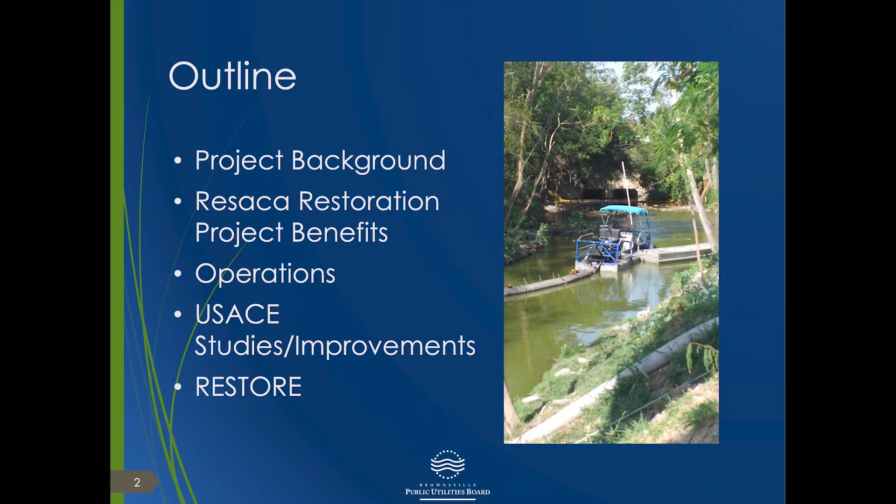I'll cover a little bit of background. I know at least some of you are familiar with the project. I'll touch on a little bit of the background for the project, the benefits of the project, our operation, and some of the work that we're working with other entities such as the U.S. Army Corps of Engineers and the Texas Commission on Environmental Quality, seeking funding grants for the project.

First of all, about PUB, we're municipally owned. The City Commission appoints the board members. There are 7 board members, including the mayor. We have electric, water, and wastewater services, approximately about 570 employees, but that changes from day to day, and about 64,000 customers, plus our revenue, which changes as well from year to year.

So resacas, for those of you that are not familiar with resacas - resacas are distributaries of the Rio Grande River. Their natural flow has been cut off over the years. Natural rain events and hurricane events would feed these waterways, these resacas, similar to oxbows, but not exactly an oxbow. So those natural flows have been cut off over the years by levees. The U.S. Army Corps of Engineers constructed levees to protect the communities here in the valley.

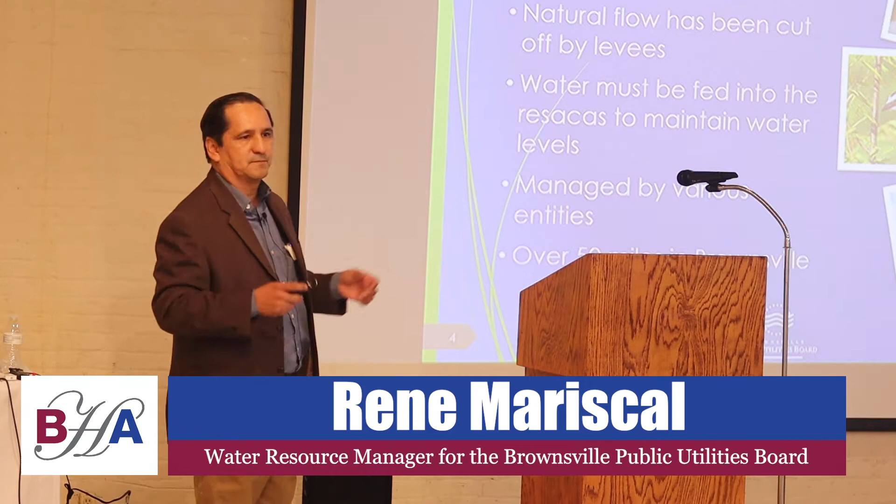So they've been cut off, and now different entities feed these waterways. PUB feeds some sections of these resacas here in Brownsville. Irrigation districts, such as Cameron County Irrigation District 6 and the Brownsville Irrigation Districts, also feed these waterways, typically on a daily basis. At least from our end, we're feeding the resacas daily. Again, they're managed by various entities. So when a hurricane is on its way, the different entities communicate with each other, and we have the ability to lower the resacas, although at a very slow pace. We're able to lower resacas and at the same time increase levels. There are over 50 miles of resacas within Brownsville.

If you look at the other resacas outside of Brownsville, Los Fresnos, San Benito, you're talking way over 70 miles of resacas throughout Cameron County. But here within Brownsville, approximately 50 miles.

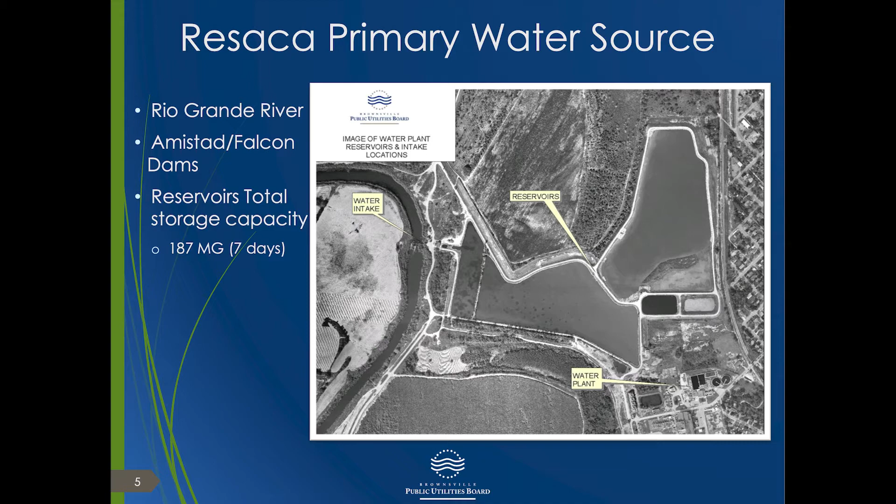At PUB, our primary source of water is the Rio Grande River. You see it here, up here, the Rio Grande River, and that feeds our 2 reservoirs. From our reservoirs, we then have the ability to feed the resacas.

From a utility standpoint, we have to order our water - we reach out to the IBWC, International Boundary and Water Commission, and we order the water for the community. We have to order the water 7 days in advance. And once we order the water 7 days in advance, we're able to store it. We have a capacity of roughly about 7 days at our reservoirs.

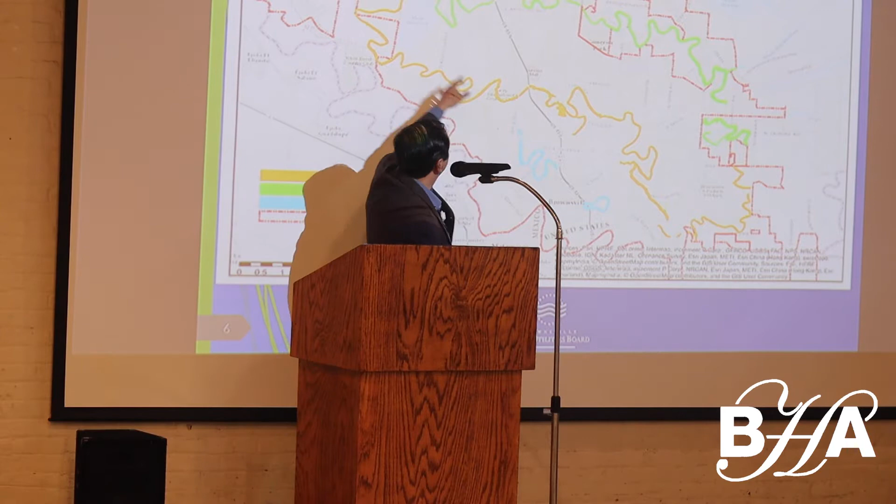The town resaca system is the one closest to us. Resaca de la Guerra runs across the city. On the northern end, closer to Alton Gloor, is Resaca del Rancho Viejo, which actually runs a little further north, stretching all the way to Olmito and Rancho Viejo. So those are the three systems.

I'll mention the town resaca system and some of the work we're doing down here. Our dredging work has all been concentrated down here, but some of the studies and grant funding we're seeking will help cover some of these other resacas, Resaca de la Guerra and del Rancho Viejo.

And there it is again, an aerial view, Rio Grande River. We pump to our reservoirs, and from here we're able to feed resacas.

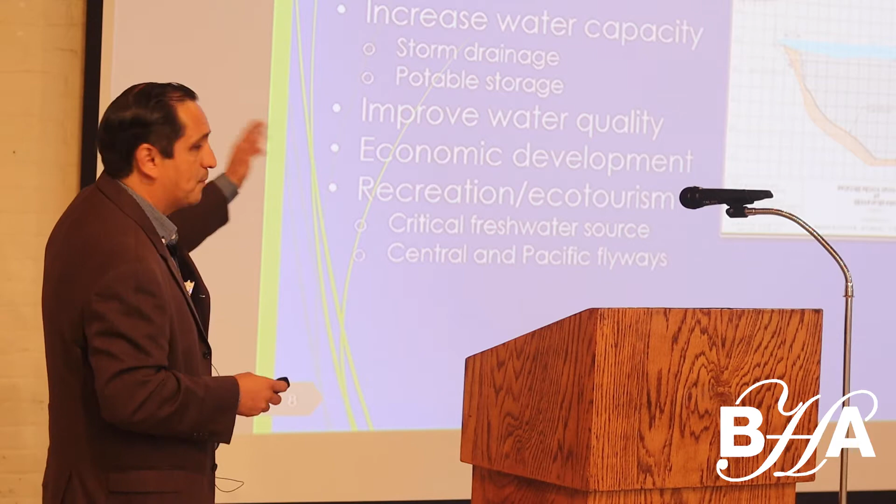So the benefits of the resaca restoration project: the resacas essentially have been silting in over years. A lot of these, really the majority if not the entirety, have never been dredged to the level we're dredging now. You may have some individual homeowners who went back with an excavator or backhoe and cleaned up their areas, but for the most part these resacas have been silting in over the years.

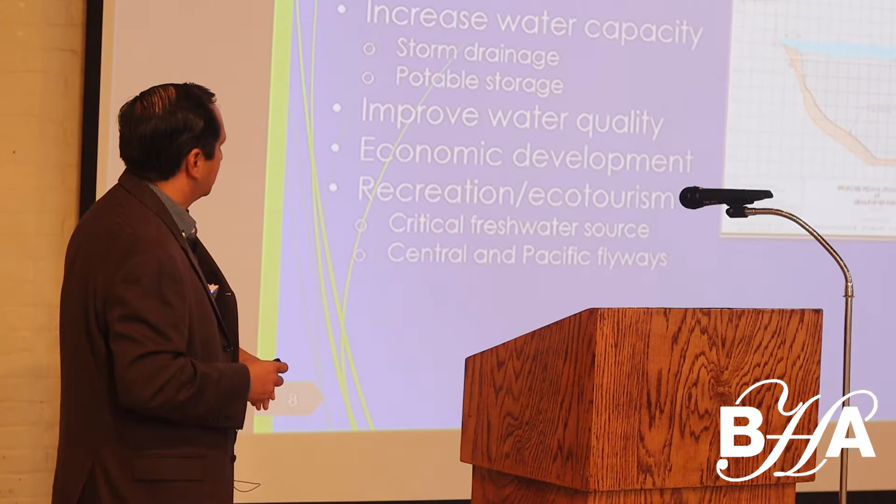One of the elements of the project is to dredge, to get back to the normal levels, the normal depth.

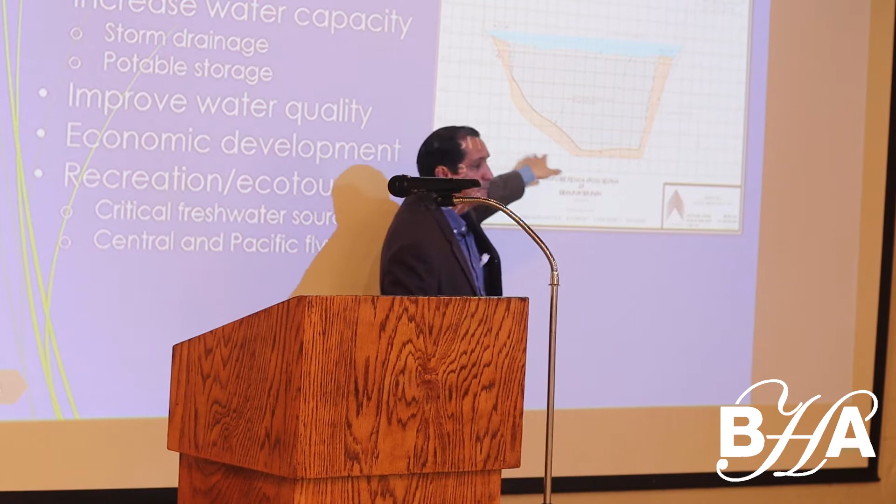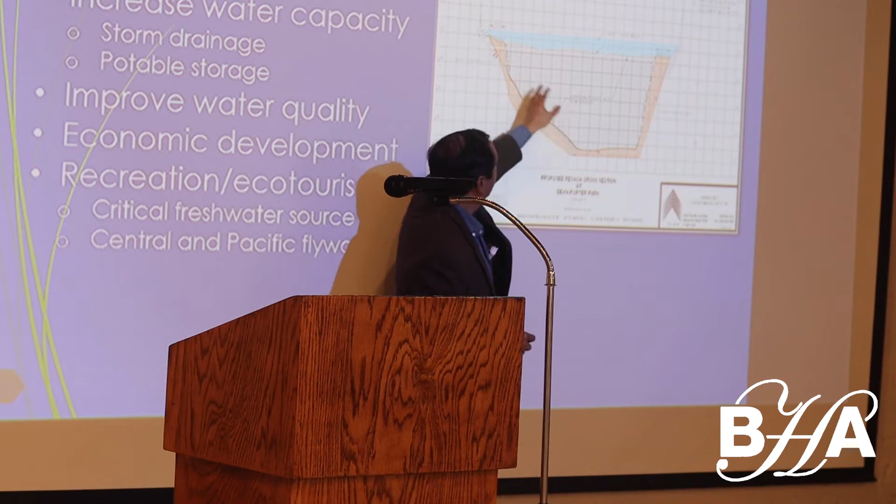This is a cross-section of the resaca at Dean Porter Park, part of the town resaca system. Every little gray square is essentially a foot, and the orange is the silt. We've already dredged this, so where we had maybe a foot or two of water depending on the area, we now have it a bit deeper, 6, 7 feet, even 9 feet in some pockets at Dean Porter Park.

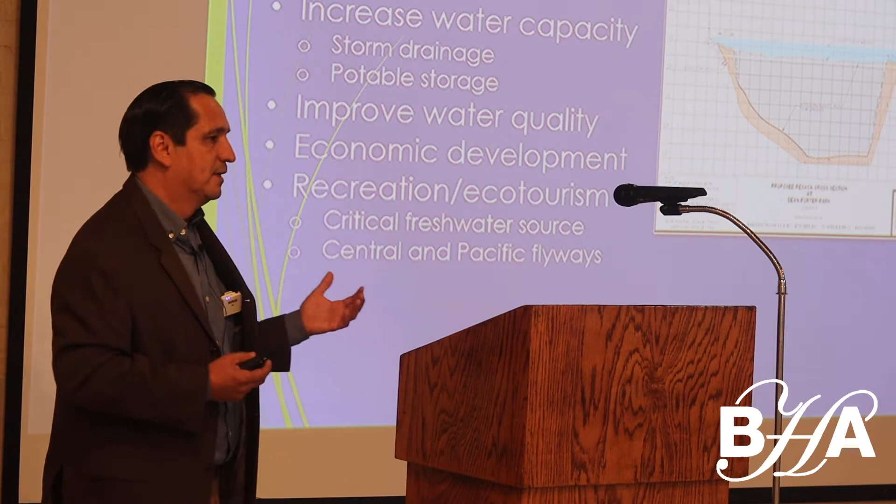So that's the goal. By doing that, we improve the water capacity. We're able to store water in these resacas, which also provides the utility with additional water storage.

How long did it take to silt in, and how long will it take to do it again? To silt in, clearly that's been over years, possibly since they were created, they've been silting in. As for how long before we have to go back: we have 50 miles, and given our current staffing and budget, we suspect it would take about 50 years to get to all of them. Unless you double up your staffing, then you cut your time in half, and so forth. But the idea is to at least work our way through all these segments and eventually restart the process.

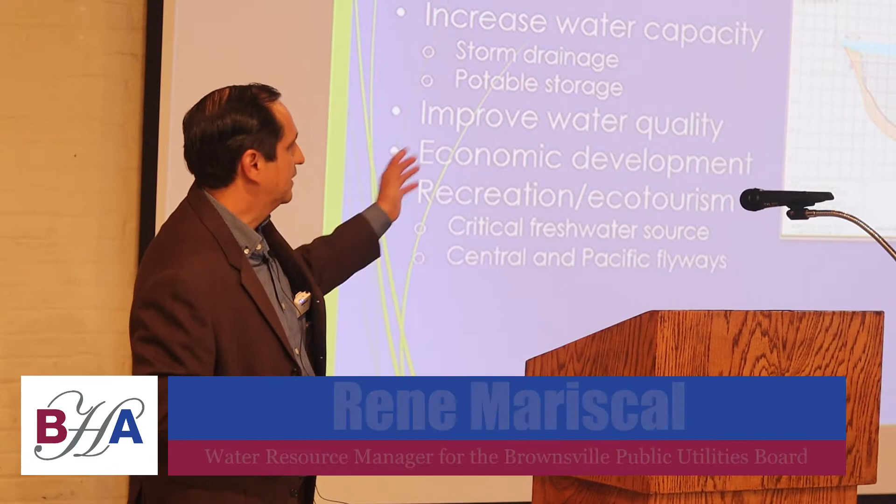Should we ask questions? Yeah, go ahead. On the three color code legends you gave earlier, do you know which ones are natural and which are man-made? For the most part, what you see here are natural resacas. You'll find little pockets in different areas that are man-made, but we're focusing primarily on the natural resacas, little pockets here and there where neighborhoods went and created their own.

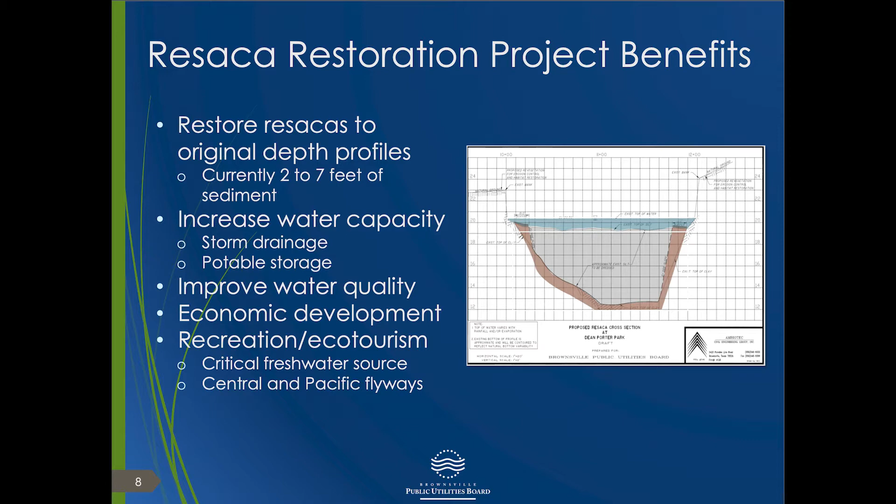Additional benefits: not only do we have storage capacity, when it rains here in Brownsville a lot of it drains into the resacas. So by dredging, you're creating not only water storage capacity but also helping with drainage, providing additional storm drainage.

It also improves water quality. Literally, some resacas are just mud, sediment, with low dissolved oxygen levels because there's very little water. In summer it's really hot, so you get low dissolved oxygen. By dredging, you help improve the water quality.

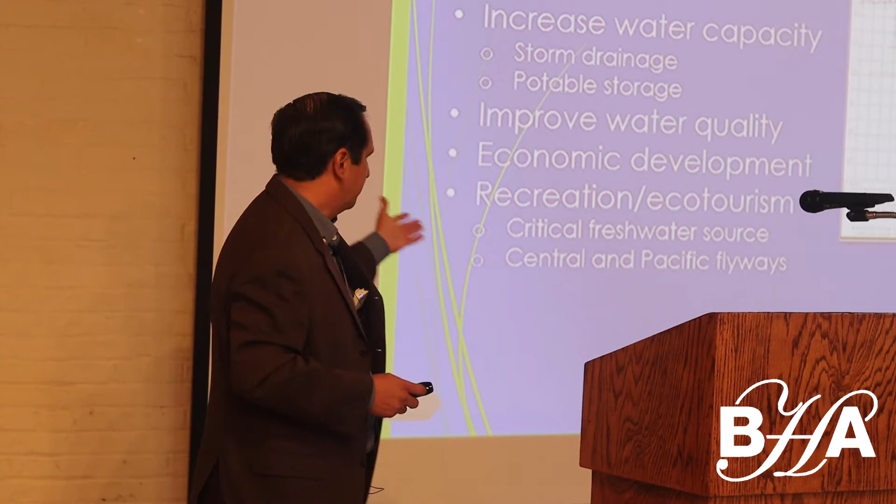There are also economic development benefits. A lot of folks have businesses with a resaca in the back. Having it nice and clean is part of the aesthetics here in Brownsville as well.

If your backyard is on the resaca, are there restrictions to use it, or are some restricted and some not? For the most part it depends on the location, but property owners typically own halfway of the resaca; in some cases the entire resaca. So it's really up to the property owners. Can they water their grass, can they put in a pump? Oh yes, yeah.

If you have a resaca on your back property, you can own it - at least within the City of Brownsville. Let me take that back - there are certain sections under the jurisdiction of an irrigation district that may have certain requirements, and that occurs even within the City of Brownsville. There may be certain sections where there's a fee, for example, and certain requirements. But for the most part, you own the resaca - that's your property. As far as city ordinance, there may be specific restrictions in certain resacas where maybe a motorboat is prohibited, but that's something depending on location you'd have to check with the city ordinance.

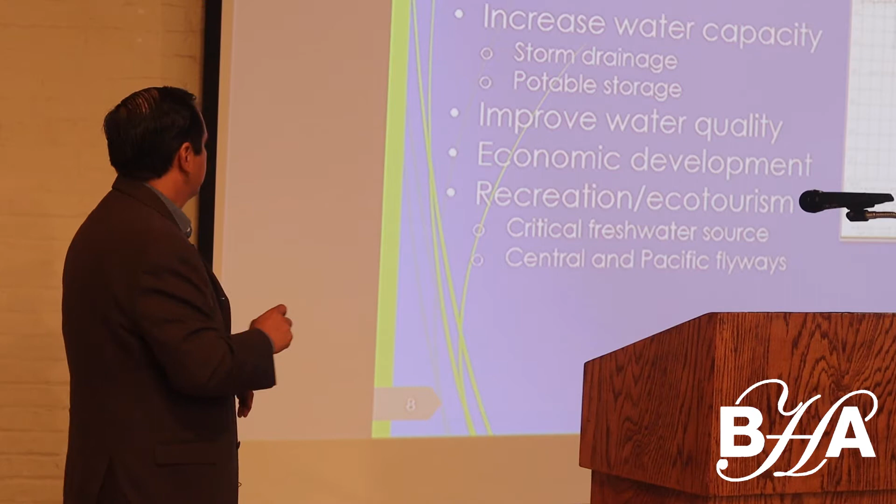Ecotourism - down here in the valley we're on the Central and Pacific flyways, so a lot of birds migrate through here. The resacas are a water resource for wildlife, and a lot of wildlife benefits naturally. As for habitat, one of the things you hear me talk about is improving some banks to provide native vegetation. The native vegetation helps with wildlife, from aquatic to submersive vegetation, and helps wildlife as well. We're resloping some of the banks, and I'll talk more about that.

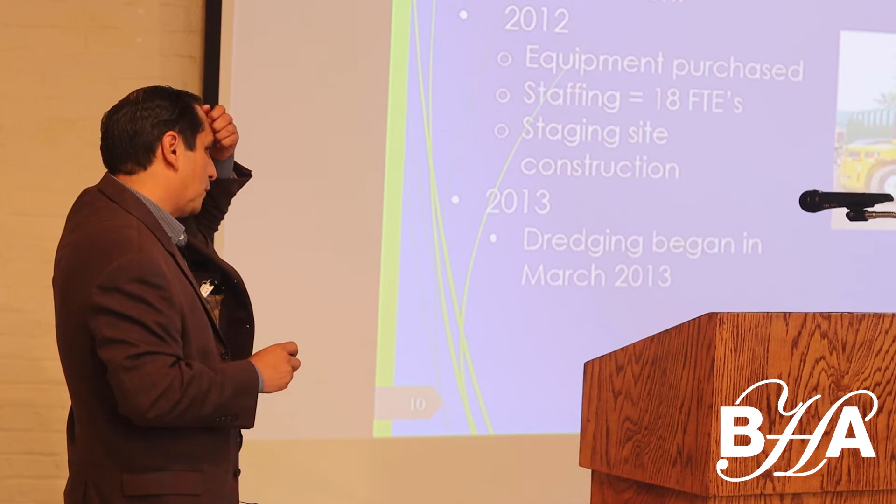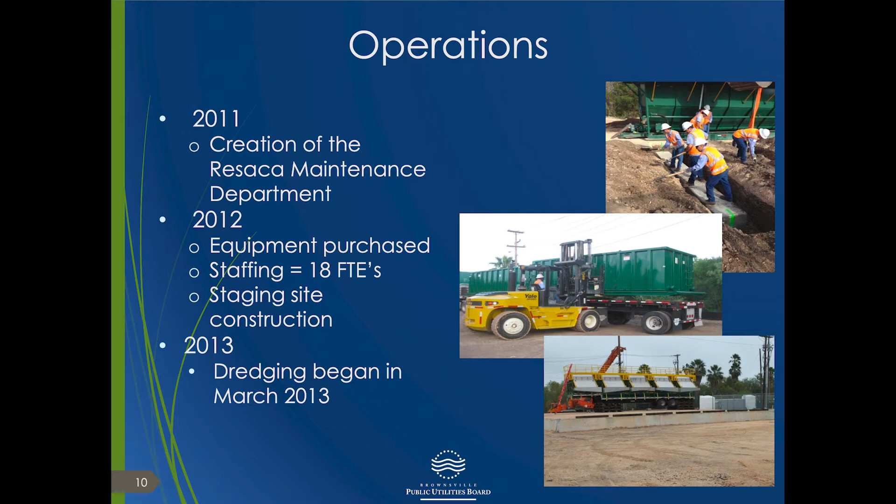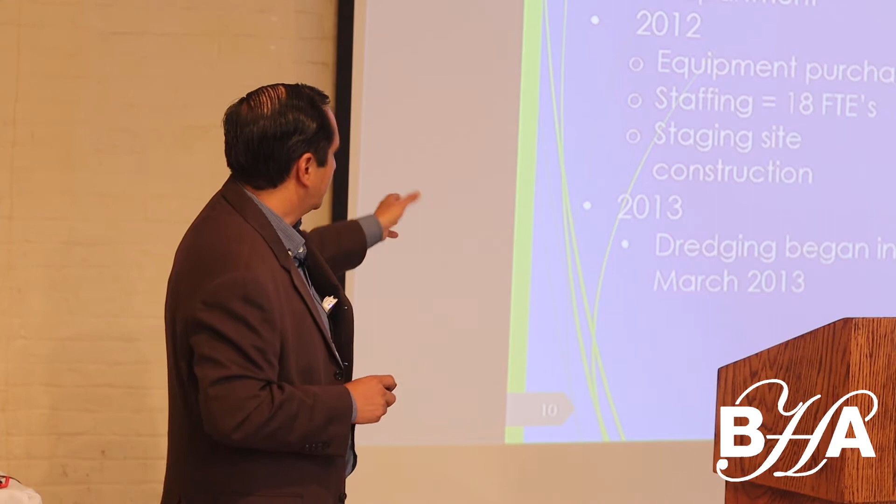A quick overview of the operation itself. We began in 2011 - that's when we first began our effort. Keep in mind Resaca Restoration had been a discussion for many years before that, but it wasn't until 2011 that the utility actually began the process of restoring. We created a department in 2011-2012 and brought in some staff. Initially we used transfer staff from different departments, but ultimately we were granted 18 employees and began the staging process. We began dredging in 2013 and have been dredging since then.

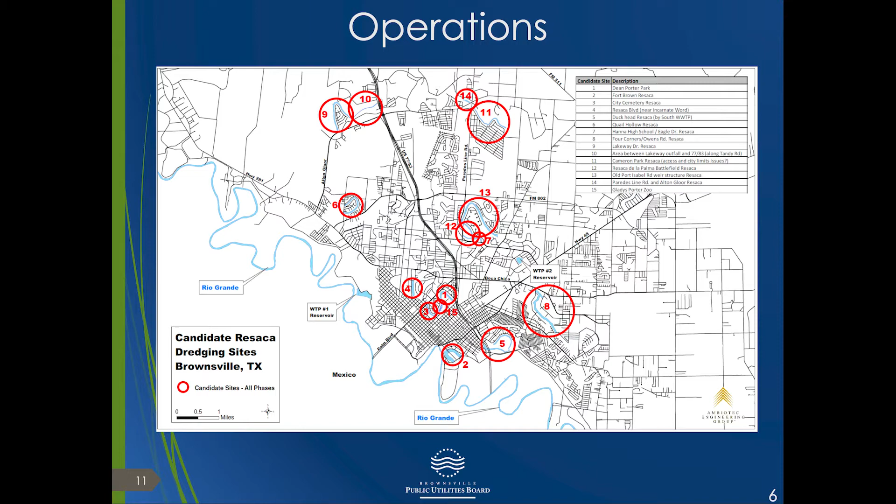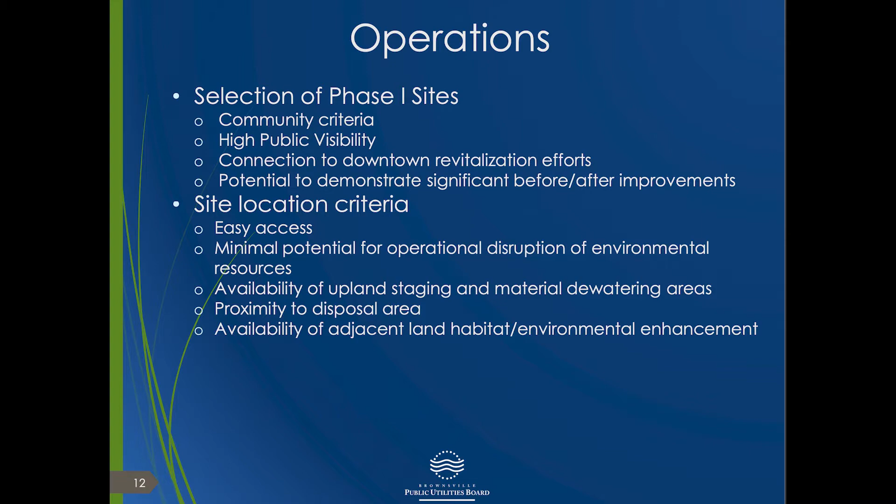One question I'm always asked is, why did you start there, or why not this resaca? There was a lot taken into account when we began. A lot of sampling was done throughout the city - this is some of the sampling that took place way back when. We looked at a number of things: community criteria, city-owned versus private-owned, the connection to the downtown revitalization effort that's still ongoing, access to use of our dredge - you'll see why in a minute - and a location for the dewatering system. So a number of things were taken into account prior to selecting what we call our Phase 1 sites.

Did you find more sediment in the older development? Oh, for sure, versus the newer ones. The Town Resaca system, the oldest one, definitely - let me take that back - had more sediment. They're a little smaller resacas, so we might have had less sediment, but they were definitely dirtier, with a lot more trash, and the water quality was not as good as some of the others, for sure.

So these are the dredges we've purchased and used. The larger dredge is in the upper left corner - that's what we use for our larger resacas. The smaller dredge, what we call our mini dredge, up in the upper right, we use for smaller confined areas.

How much work has been done on Resaca de la Guerra by the water plant intake? At Resaca de la Guerra, dredging - zero. All our effort right now has been at the Town Resaca system thus far. The only area we've dredged close to that is a little area called Parkland, which is PUB owned. Did that help with sludge disposal or anything for the water plant? Well, all it did was create capacity at the resaca, but that's really about it.

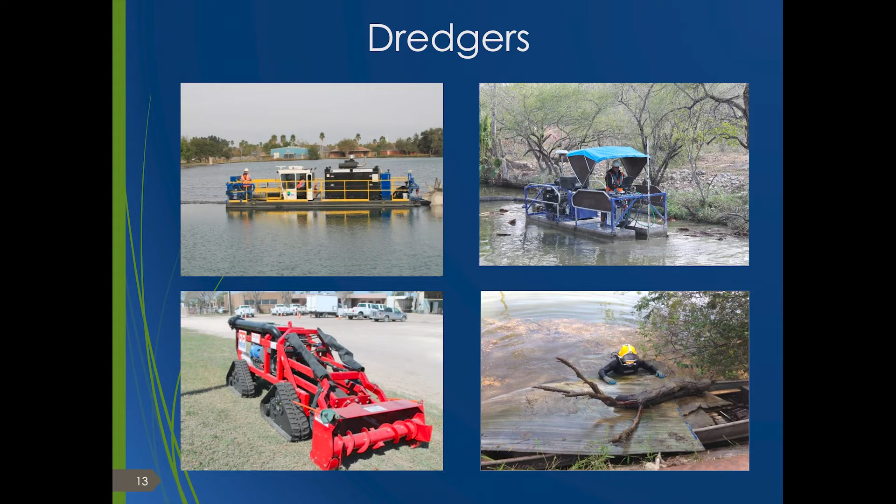So these are the dredges. Bottom corner here - this is a dredge we tried the first few years, an underwater submersible dredge you could operate remotely. We tried that at the zoo because it's really confined with little bridges, so you could get this one in there. Ultimately it did not work, so we resorted to divers working underwater. That was definitely interesting - a much slower process. Picture someone underwater removing mud, vacuuming the material, but underwater. That definitely changed our schedules for sure.

You won't be able to see the dredge for any of you that go out to the dewatering site, because it's located further away from the dewatering system. But this is the dredge that we use right now.

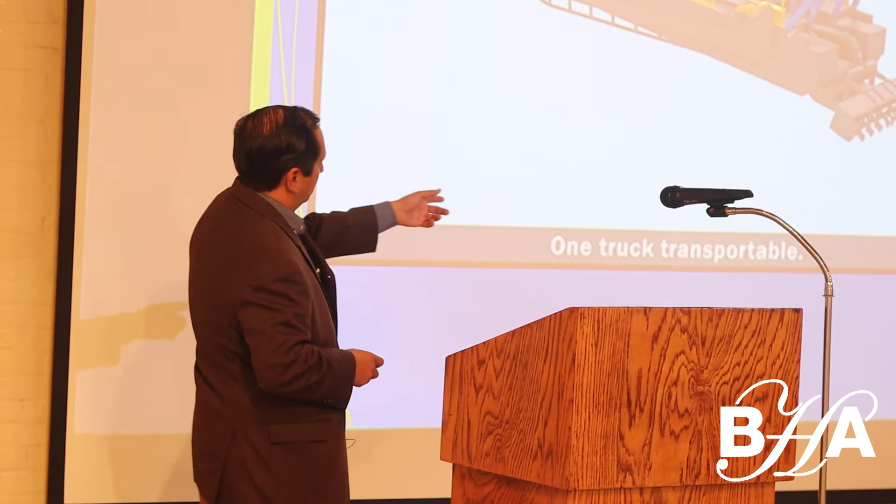It's located within the Town Resaca system, just a little further away. We purchased this because it was one truck transportable. Here in Brownsville. We have to move from resaca to resaca since they're cut off by roads, etc. So we'd have to transport the dredge from location to location.

What you have here is a cutter head. This is what's breaking up your sediment. These wheels are what we call star wheels. They're what propel you and help you move around.

The material is dredged, and then with the hydraulic pumps, it's pumped to the dewatering system. That's what the cutter heads look like.

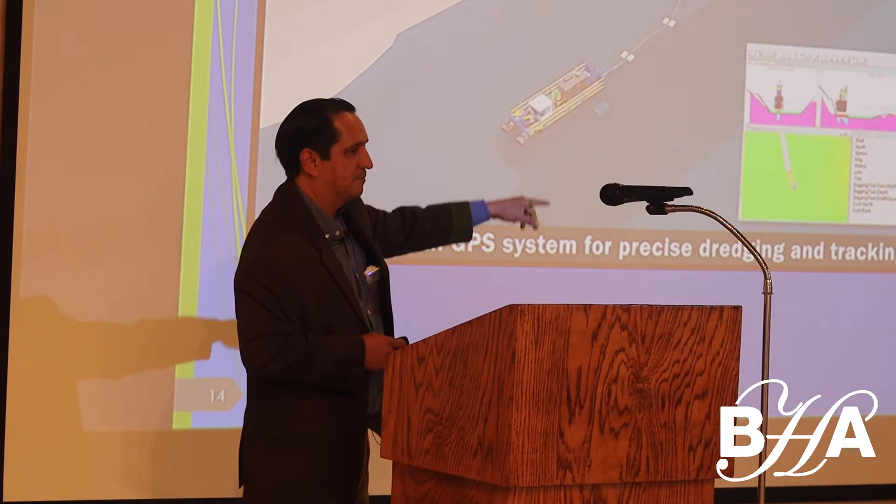Hydraulically pumped via floating pipe to our dewatering system. We don't have that exact dewatering system, but that's the concept. This is our dewatering system.

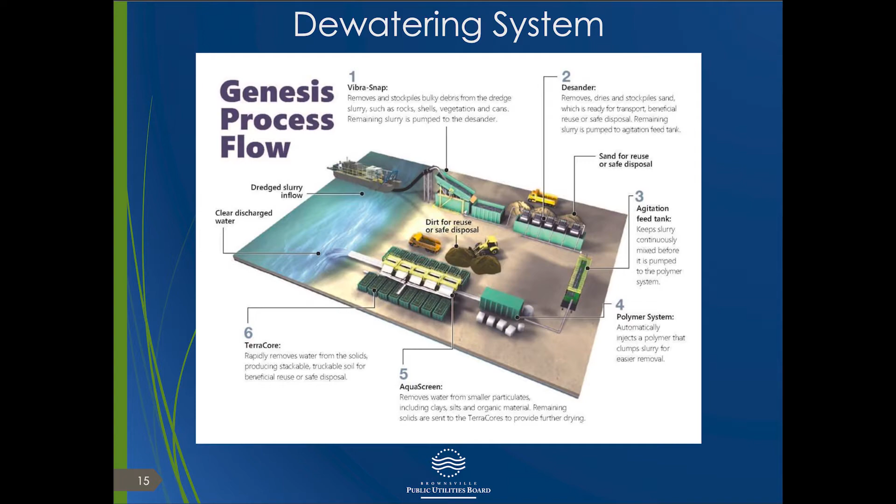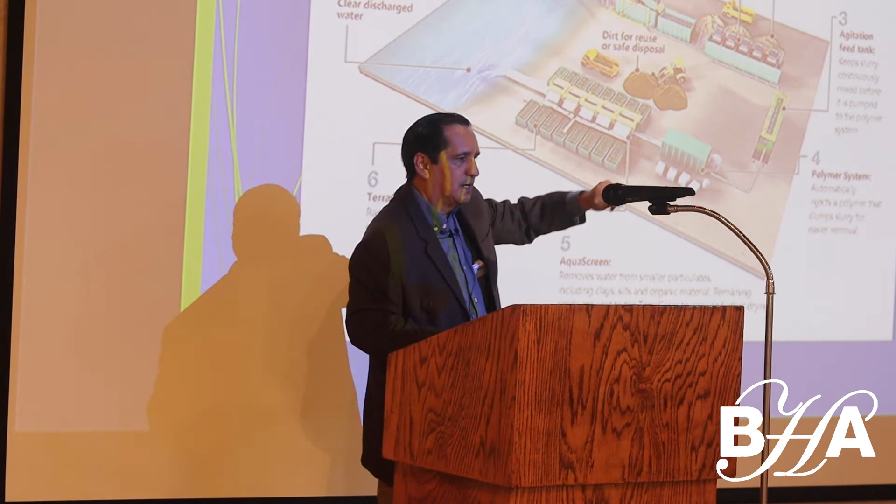For any of you that are able to attend, what you see here is what we're going to go visit - the dredge in the water of the Resaca. Right now it happens to be maybe about a mile and a half away.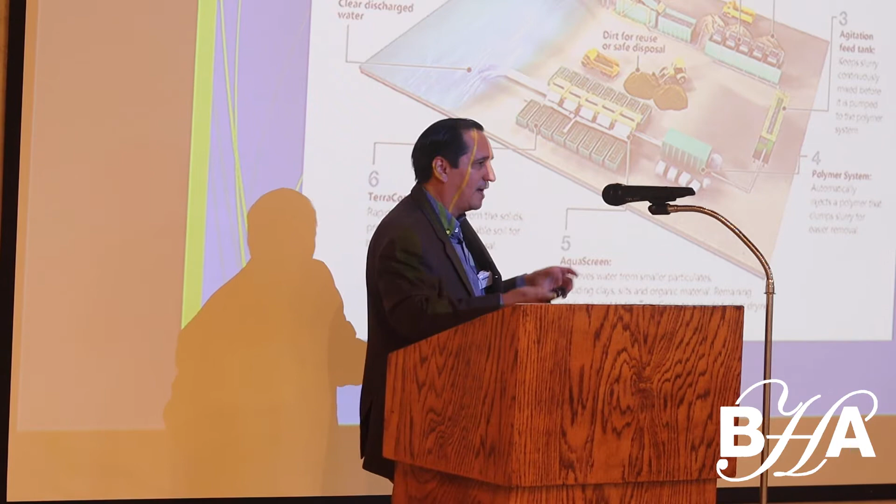We're pumped via floating pipe to our dewatering system. Here in the dewatering system, the first set of units captures your trash. We have a separator that captures trash, and then it goes on to different units - a mixed tank, then separation. We add polymer during the process, and we collect all the sediment in 14 boxes that we have at our dewatering site.

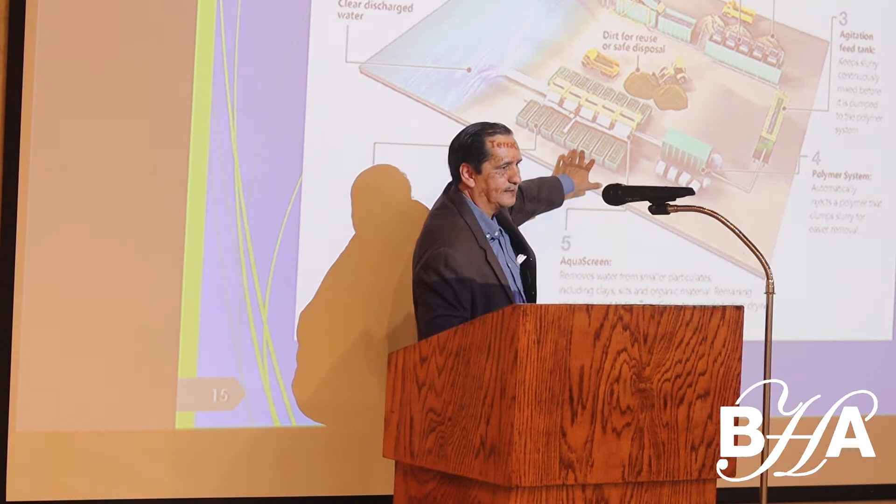The water, the effluent, is returned back to the Resaca. We test the water during the operation. We're testing the water at all times.

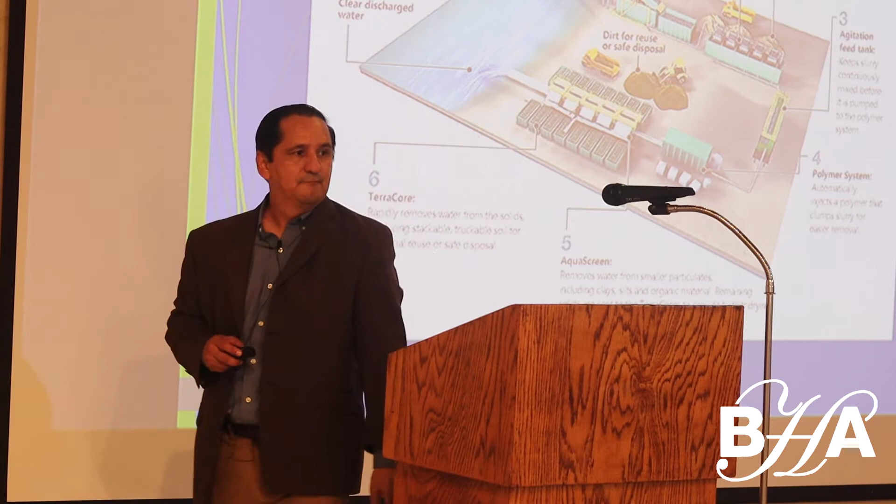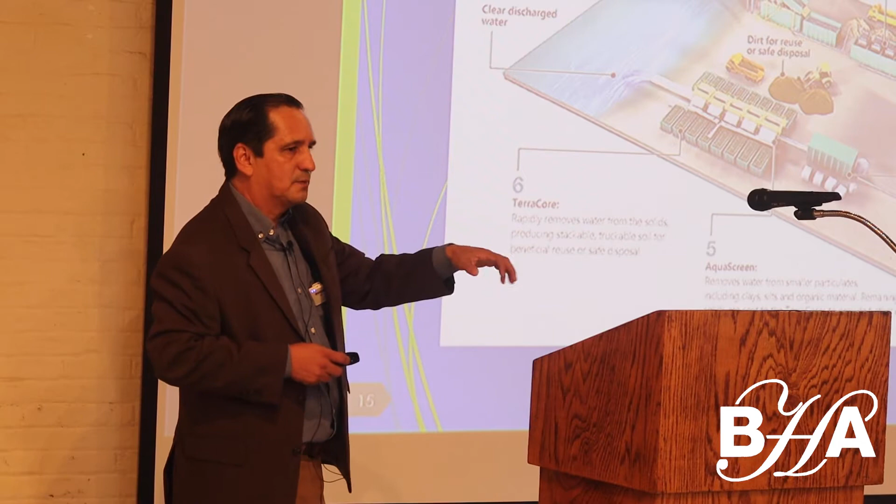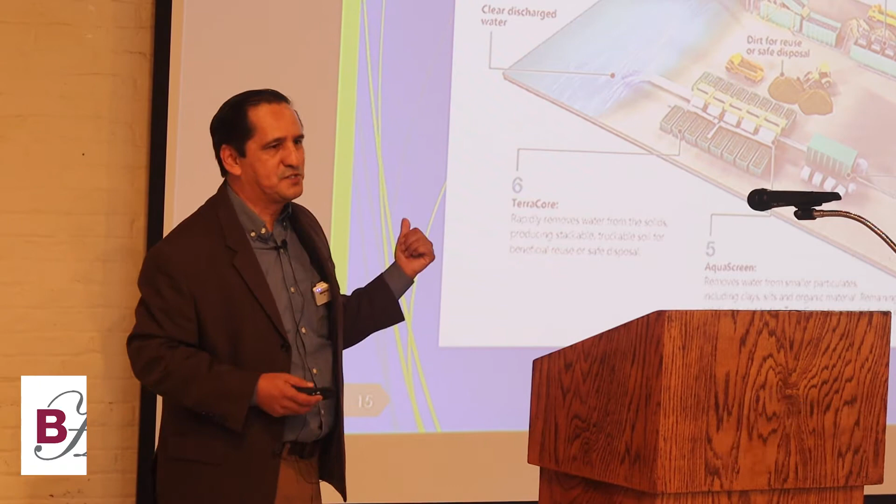What do you do with the sediment? The sediment gets hauled off to the city landfill, to a temporary disposal site, and we have the permits and authorizations from the city to use it as what's called alternate daily cover for the trash. So where the city would typically go dig a pit and use that dirt to cover, they still do that - what we generate isn't sufficient to use as cover on its own. They still create their pits and use that, but this helps supplement it.

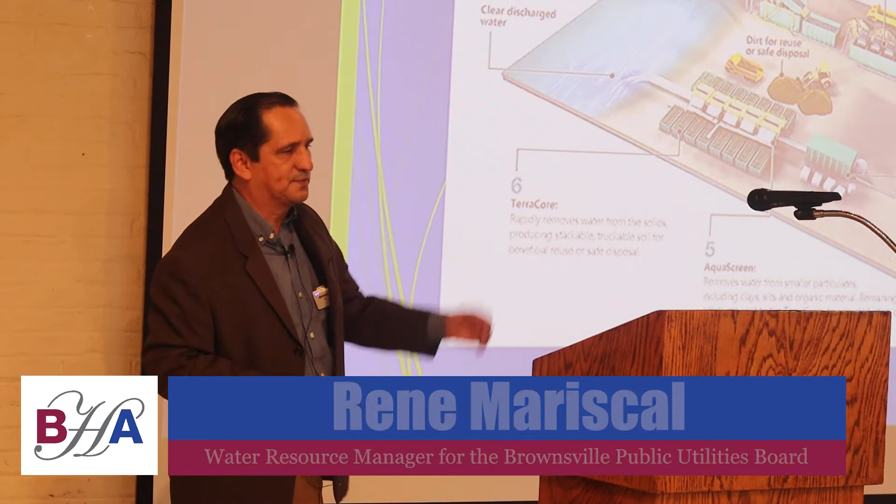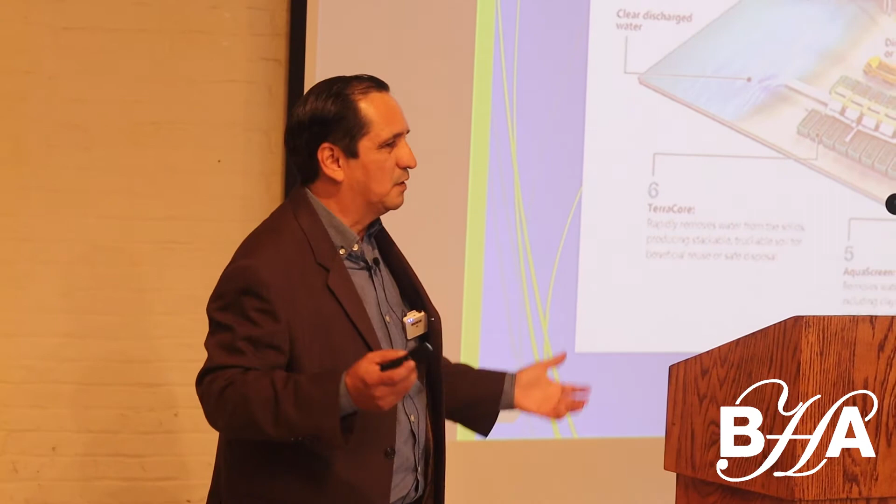Essentially, it's recycled. How fast does the water move through? Is it constant? Well, the dredge is pumping at about 1,200 gallons per minute. That's what the dredge is pumping at.

But for the most part, it's a steady flow. A lot of times you run into trash or carts, etc., where we have to stop the dredge. There's a lot of that depending on the Resaca.

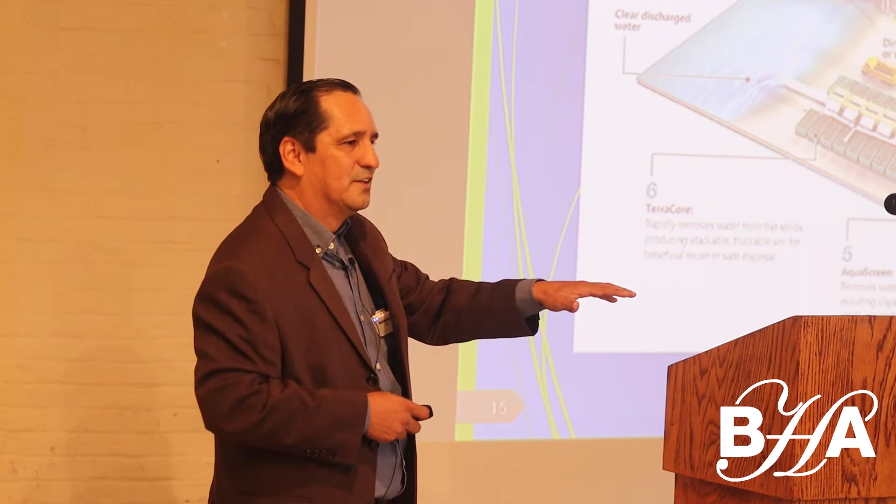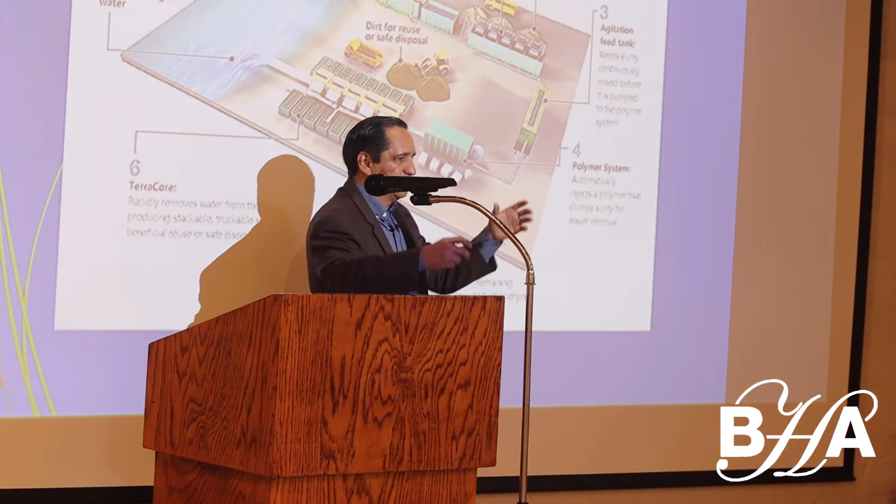So you still have some flow going through it because one of the tanks is what's called a mixed tank, and it serves for that very purpose. It helps you collect enough water, sediment, and slurry in there, so that's always feeding a consistent flow because we know the dredge is going to be on, off, on, off, on, off. So one of our tanks helps provide a steady flow to the polymer and separation process.

Does that answer your question? Yes. Okay.

Quick video of the dredge. This is when we were over at Dean Porter Park, part of the Town Resaca system as well. That's the dredge up ahead, with the floating pipe. And this is the dredge that we have in the water now.

Yeah, the wildlife loves these things - turtles and so forth.

So this is the first unit. Water - you see up in the upper left - slurry's coming in. You have a separator; there's your slurry or mud coming in from the dredge. The first separator removes, essentially think of it as a shaker, collects and removes your larger pieces.

We have found all kinds of things. And then it goes on to a second unit. This separates your sand, so you're able to collect finer material, sand, and then it ultimately makes it to our polymer system, begins your separation, and then lastly ends up in these 14 boxes - 7 here and 7 on the other side. The effluent, the water, goes back to the Resaca.

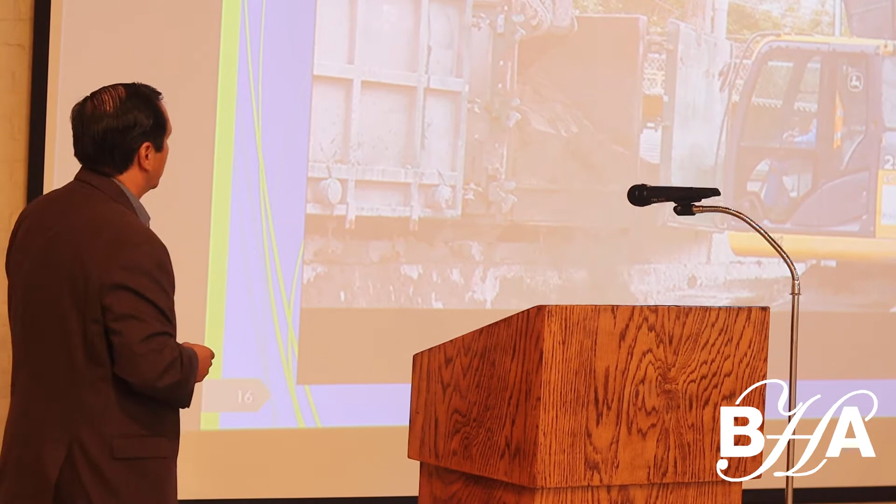The next day, we come in with our heavy equipment, empty the boxes, load them up, and haul them off. We do this on a daily basis. The next morning, we'll come in - these boxes, think of them as baffles that help dewater the process - and remove all of that from each of the boxes.

We have to clean the ladders, what we call ladders, but they're baffles. Empty each of the boxes. Jump back in there and clean the boxes. And then load and haul off.

It's a process. Versus what you saw in the other animation where you're just dumping it into a containment basin. One of the reasons we have to go through this process - this is approved by the U.S. Army Corps of Engineers - is because a lot of the Resacas are urban. You're in neighborhoods, so you're limited, and it'd be nice to have that space for a large containment basin where you can fill it and then it naturally drains.

This is the process that we have because of that. Tight space, small footprint for the dewatering system.

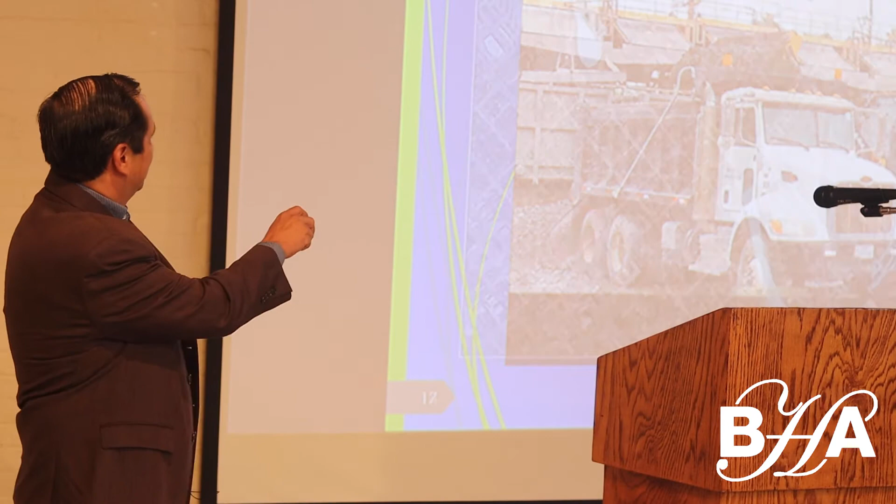So these were our phase 1 sites. Off we go, we begin dredging. This little red area is a staging area - this is where the dewatering system's at. But then the very first resaca is what's known as the cemetery resaca. That's where we began - small segment, over 200 tires. And then Gladys Porter Zoo - this is what we've dredged thus far, and a little more.

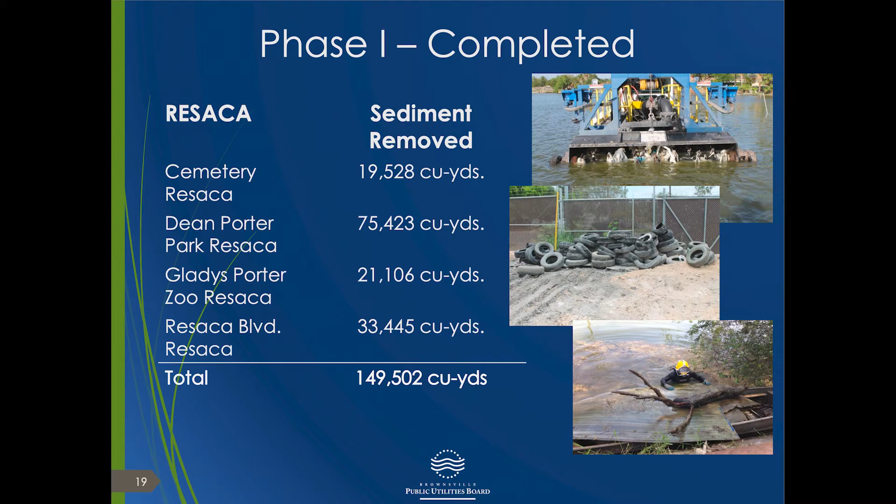Sediment removed for that section - there's your tires and plastics. I should have mentioned plastics - see, the dredge, the cutter heads, a lot of plastics, plastic bags, bottles, etc. that we collect, and ultimately that stops your operation. So originally we had a schedule that we're going to move along this phase - well, that went out the window from segment 1. That's what you pretty much answered my question - will it pick up the tires, or does that stop the machine?

Do you have to go and manually pick them up yourself? I don't know if you noticed, there was a little John boat in one of the videos right next to the dredge. We have a dredge operator dredging, and then we have a second individual in a little John boat, because this happens so frequently. The individual in the little John boat - dredge turns off, goes and has to manually remove your trash. So there's your delay, and off we go again. It depends on the resaca - there's been a couple of little segments where we're like, wow, this is really clean, but for the most part you're getting a lot of that. As far as the tires, notice how some of them are intact - these are, for the most part, the ones that made it. Some of them just get tangled. Every now and then you hit a tire the right way and it just pops up. So it just kind of depends, but yeah, that's what we encountered.

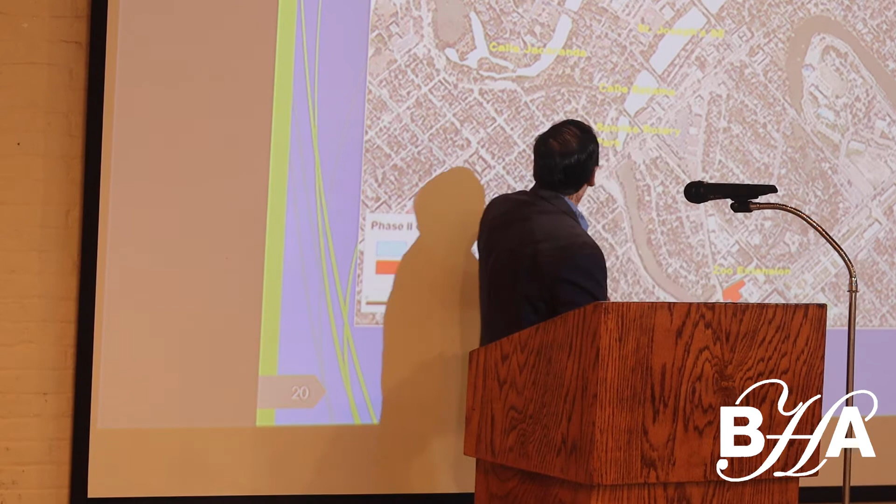All right, so on to phase 2. Completed phase 1, we began phase 2. For the most part, within phase 2, we've covered this little segment, this little segment here, and this segment down here - what we call the zoo extension behind the zoo. Dredge there, dredge this, so we have this pending. This is important because I'm going to talk about some grant funding, what we call Restore, and hopefully Restore covers funding to finish this off.

And that's the zoo extension, that's a little segment right behind the zoo that we've dredged, removed about 6,000 cubic yards.

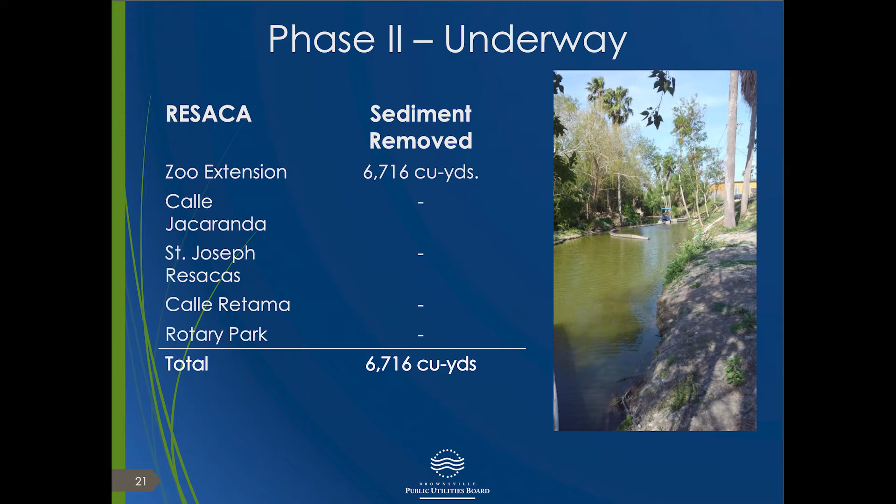What's the cost per foot or whatever? Are you getting into that? Yeah, I'll touch on that.

In addition to that, we do some water monitoring. We did some water monitoring prior to and after we dredged. We received some funding from the EPA for water quality monitoring, a couple of grants that we received thus far, where we've had an opportunity to collect some water quality samples.

In addition to that, one of the things that we wanted to do was a fish population study, just to get an idea of the quantities and variety of species. We collected that data, and as we dredge we'll come back and do that again just to see the changes. This fish right here, I included this fish.

It's called an armored catfish. These are invasive, and they're all over the resacas. They're a South American fish, and hot water, low oxygen, that's where they thrive. Clearly our resacas are providing that, and they're slowly taking over. That's something we work with Parks and Wildlife on—it's a big problem in Florida, and it's a problem here.

What kind of problem do they cause? Yeah, so for the most part, these don't have a predator, and they're just taking over. They eat away at a lot of the native vegetation that would provide habitat and so forth. So they're slowly dominating.

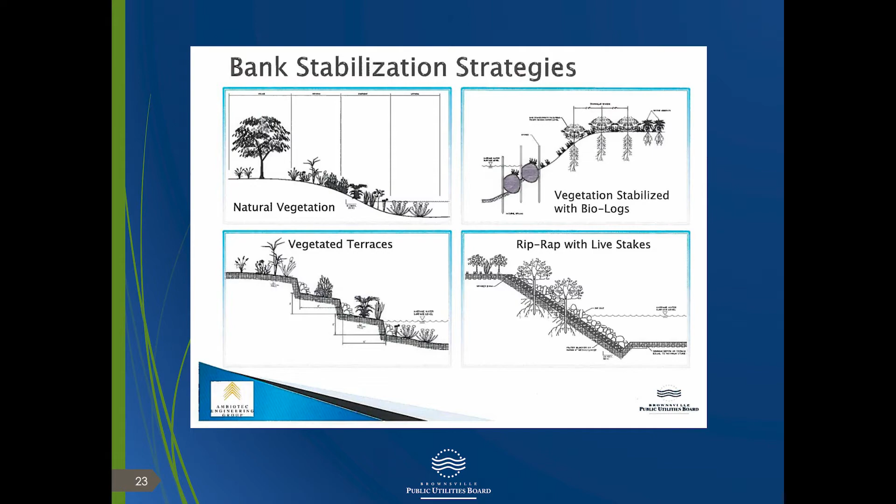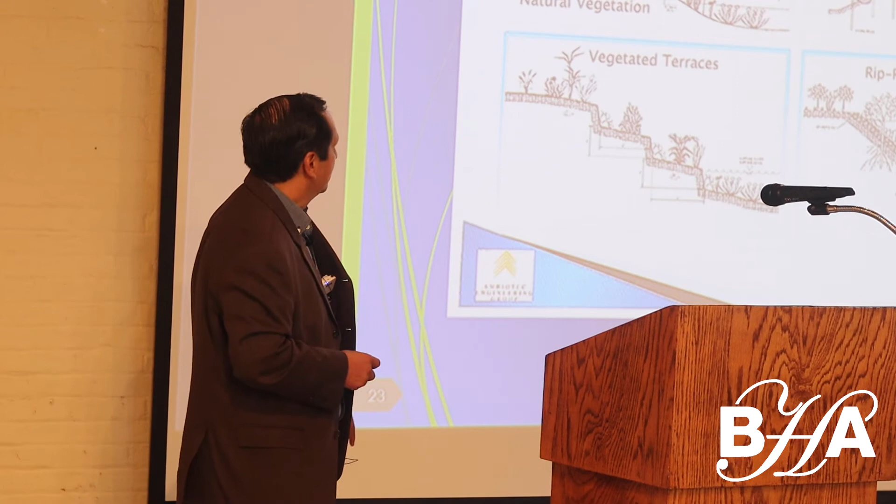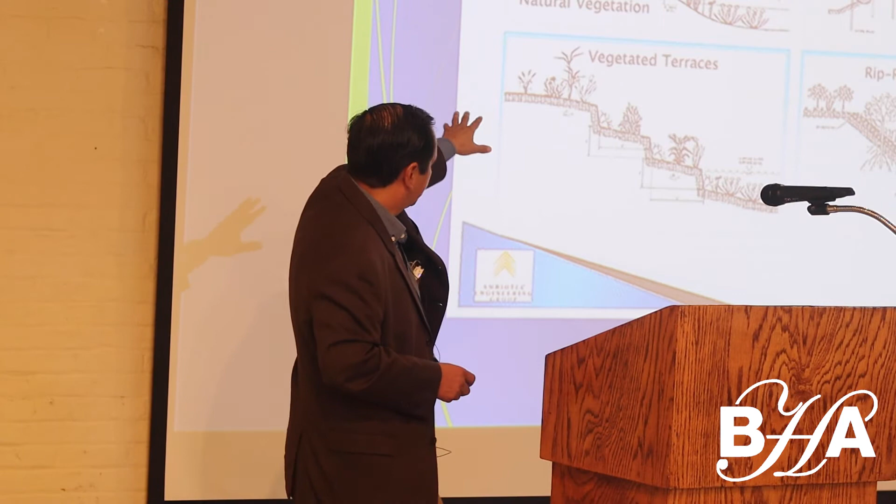Ideally you have something like natural vegetation where you have gentler slopes that allow for amphibians to come in and out of the water, versus steep slopes. But we can't do that in all locations—some locations are just too steep, so you resort to other strategies. We've employed a little bit of natural sloping, riprap, and vegetated terraces.

Cemetery Resaca was the first resaca that we dredged, so these are some of the improvements that we did. And this one, for example, you didn't have this before.

You have a rain event, it goes into the storm drain. From the storm drain, it went directly to the resaca—trash, whatever it was, ran off. Now it comes in here, it collects, giving it time to collect trash and sediments, etc. You can't see it here, but there's a box that sits a little higher, an overflow box, so that when the water level reaches a certain point, it overflows into the resaca.

So this was something that we were piloting. We were looking at the cost—clearly that's an expense. How can you do that throughout the city? Clearly you can't do it at every storm drain, but we wanted to get a feel for cost and how we could implement these strategies.

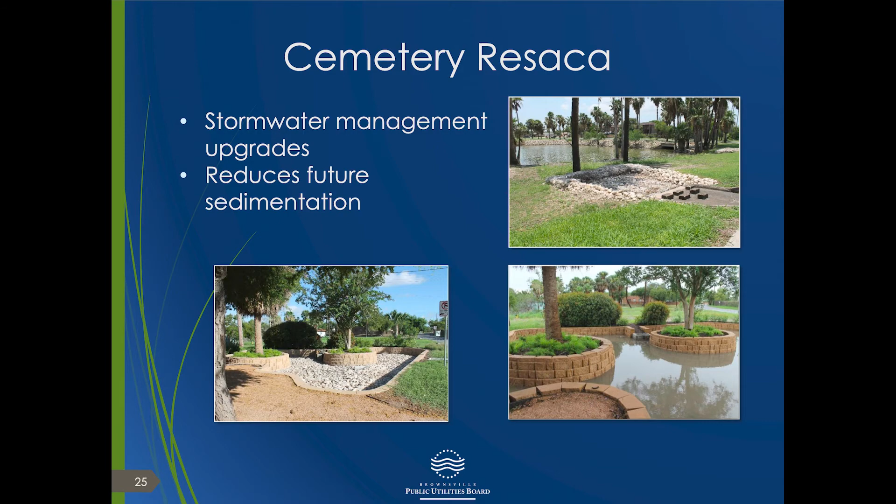Here it is, here it is with water—same one with water, here's your overflow box. Once it reaches a certain level, your water begins to overflow, and it allows for the sediment to settle. A less expensive method is something like that: a gabion, just rocks, helps collect from a storm drain, helps collect trash, and allows for water to run off. Costs a lot less, a lot prettier one definitely costs a bit more.

In addition to that part of the project, there's a lot of community outreach—events such as this. At the Children's Museum we have an exhibit about the Resaca Restoration and the process that we go through. We've done some outreach with schools and different festivals. We have a YouTube page, Facebook, all the social media. There are sections on the project if anybody wants additional information—you can go to those.

So that's part of the project, because clearly doing the work is one thing, but that outreach helps communicate the fact that these are unique waterways and we've got to take care of them.

Okay, so back to your cost question. Originally, the capital cost up front was a little more expensive, clearly. We had to buy the equipment, a little over $6.7 million right up front, just to buy the dredging, the dewatering system, and so forth. On an annual cost, when we're dredging full-blown every day, it's about $2 million.

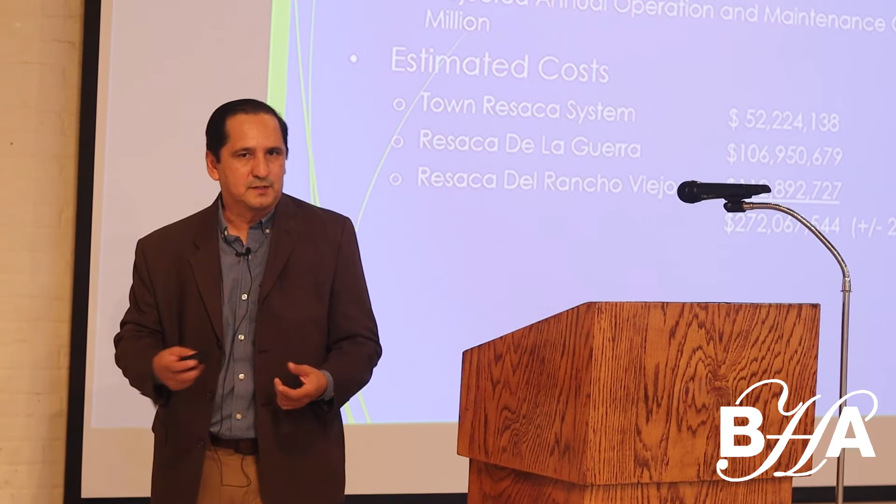Here's just a projection, estimated cost for dredging all three Resaca systems, based on depth, pump rates, and so forth. About $272 million to dredge the entire systems within Brownsville. So clearly a challenge, right?

So one of the goals is to go seek some assistance. One of the projects we work with is the U.S. Army Corps of Engineers. The one little segment, another about 2,000 feet, was what we call Resaca Boulevard.

A study began, what's called a feasibility study, in 2015. It was completed a couple years later, and then off we go with design and improvements. We began the improvements in 2017.

The study found that just for that segment, it was about $1 million, $1,035,000. There was a 65-35 cost share. The Corps pitched in 65, and PUB funded the additional 35. The contract was awarded in 2018, and the improvements were completed in 2020, roughly.

And what did that consist of? You were asking about invasive plants and vegetation - Brazilian pepper tree and other invasives listed here along the resacas. They take over and don't provide the natural habitat for the wildlife in our area.

This is some of the more native planting. The Corps harvested all the plants and provided them, planted them along this segment - upland plants, riparian plants - in just a couple of the areas.

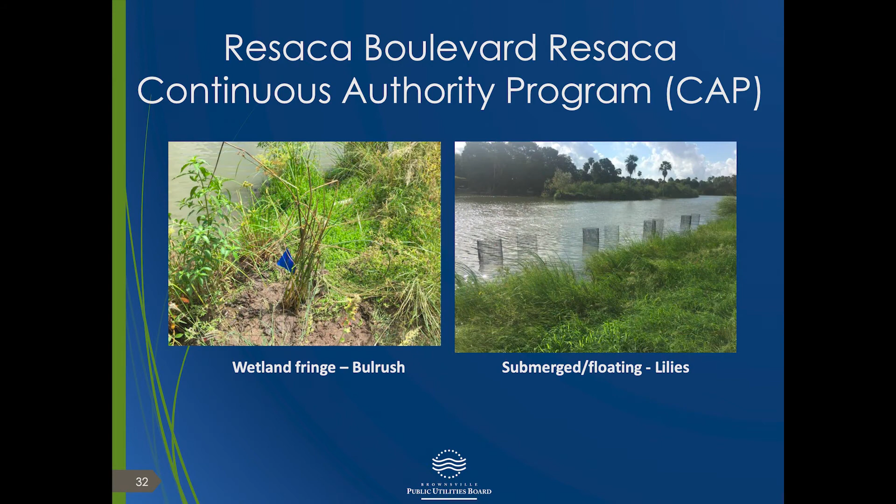And then some submergent plants. You see those cages with lilies within the Resaca system. So that's that study, and that we've completed.

If you were to drive along Resaca Boulevard, one of the challenges is the education on native vegetation. So that was the goal, and so grass started to grow, right? And you get a lot of calls about who's taking care of those weeds, who's going to mow those weeds, because we have no-mow zones, since we want the native vegetation to establish and grow.

So education is a big component of it, and you slowly start explaining, well, this is what it's for and why we're doing this. Every now and then you still get, 'well, I need that mowed.' But nevertheless, that's the objective, and clearly we recognize that we can't do that everywhere. We're not going to do that behind people's property. We understand that. But these were city-owned property, so that's where we're beginning, and we'll see what other opportunities arise. We recognize you're not going to go do this behind somebody's backyard.

So that was what's called the Continuing Authorities Program, a small pocket of funding available by the Corps. A larger study with the Corps was looking at all three Resaca systems, the entire three. That was a feasibility study that cost $3 million. Our share was a 50-50 match, $1.5 million.

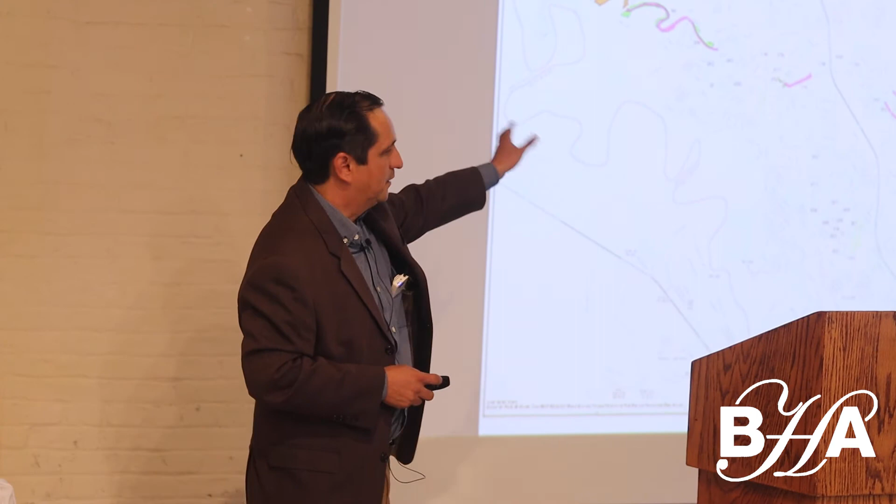The study was completed in 2018, and then the findings were, okay, these are all the improvements we recommend we do throughout the system. The one we're working on now is not color-coded, but the other two systems - those are the pockets where they found opportunities not only for dredging, but for bank improvements in some areas. And you'll see it's not everywhere, because in some areas you have homes.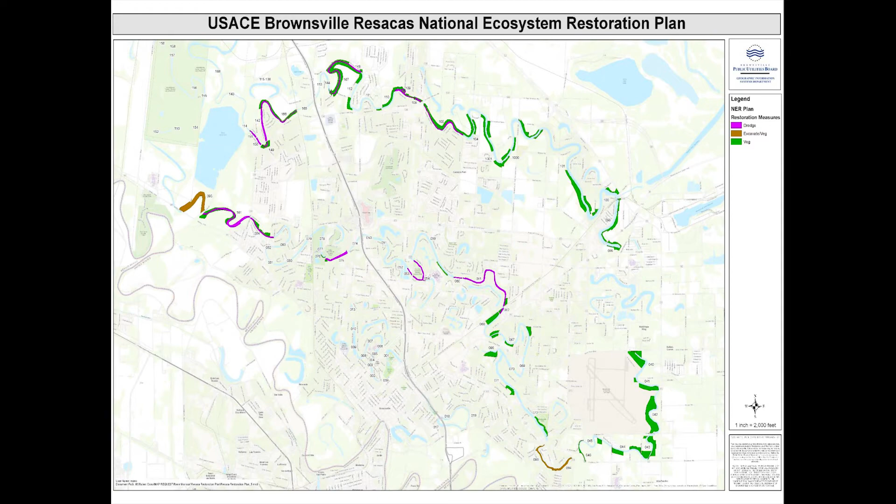You have areas where homes come up on both sides, so there's no opportunity. Just a few areas with opportunities.

The study, the project made one of the acts, the AWI Act, in 2018. So that's already, via Congress, listed as a project of interest. The next step is hopefully getting the funding for the improvements, and I'll talk about the cost.

And this is estimated cost now. One of the things from the Corps' perspective - they make it very clear, if we go improve some land, it must be maintained for 75 years.

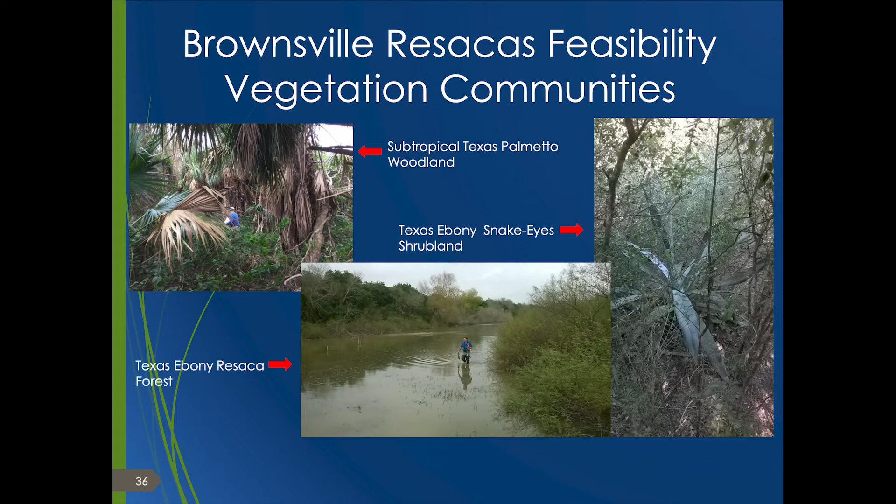What the study found is that the habitat left within the Resaca systems, the natural communities, these three, are the natural communities. These are pictures here in Brownsville of natural vegetation in certain areas, where we're down to 1% that's left of this type of habitat. So the idea is to protect that 1%, and wherever feasible, go back and bring this type of ecosystem back. We know that can't be done everywhere, but there are a few pockets left where you want to protect this, and a few areas where there's an opportunity to bring it back. But we're essentially down to the last 1% of this type of Resaca habitat.

Is the city working with new development so there's some balance to be protected? Yeah, the city of Brownsville and we are one and the same, we communicate with each other, we definitely relay the information. They're aware of the project. But specifically, is there a city ordinance in place now? I don't know if there's something now that would restrict development. Clearly, when you buy a property, it's your property. But I know for sure that in areas where it's city property, there's definitely an effort to at least protect it, if in fact it has this type of environment.

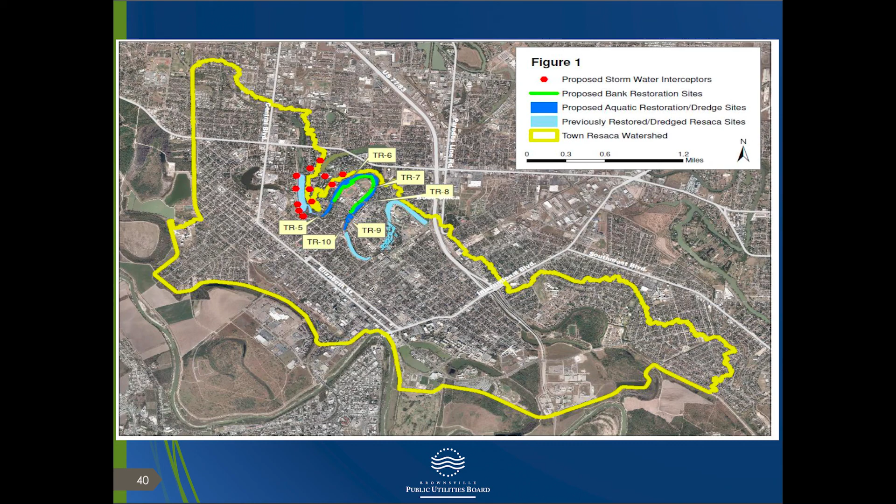So when we applied in 2016, we were actually dredging elsewhere, and we knew we'd eventually get to this second section, what we call phase 2, which is what's being funded now. When I say we were awarded in 2020, that's when we received the award letter. But in between then and now, there's a lot of requirements to meet — permitting, property ownership easements, and more.

But this is what that funding will help with: dredging in dark blue, bank improvements in lime green, and stormwater interceptors shown as little red dots just upstream in that area. Instead of a regular storm drain, these stormwater interceptors replace the storm drains and help capture sediment — same principle: water rises, overflows, and it gives an opportunity to collect trash and sediment.

So there's no sumps for that, it just does it naturally? The rain, for the most part, in most places ends up in storm drains. We do have drainage systems like the canals, the main drain — a lot of them drain there. But some areas, depending on the neighborhood, drain into the Resaca. The city has a drainage system with the north main drain and another larger system to collect some of that, so not all of it goes into the Resacas.

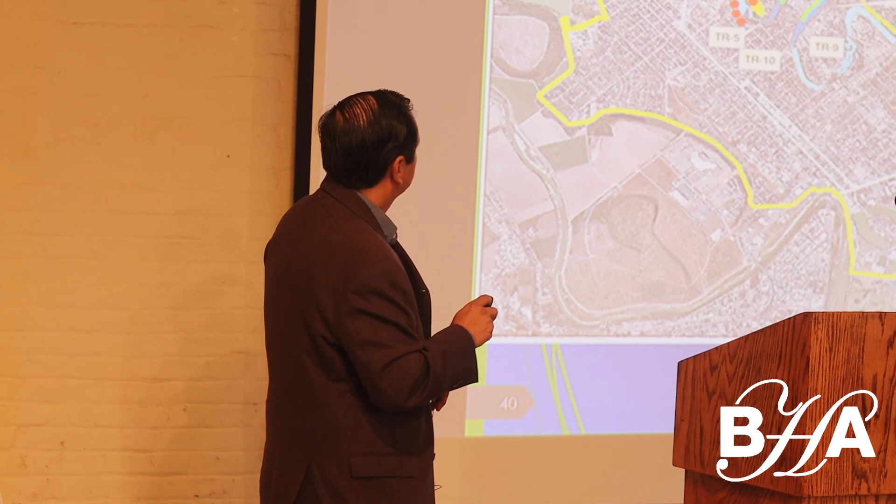So back to being awarded in 2020 — we're finalizing our permitting for that particular project and hoping to begin here soon. I say November, now I just say soon, because I've been saying we'll be there next month, and we're hoping to start the project really soon.

That segment, once we're able to start, is a 2-year project — dredging around that bend and bank improvements and so forth. It'll also help fund 18 staff members, and consists of dredging, bank improvements, some weirs — we'll actually be replacing 2 weirs in the area and a gate valve — bank improvements, and 12 stormwater interceptors, because after you dredge, you want to protect that investment, and the interceptors help minimize sediment going back into that area.

That was it. Any questions?